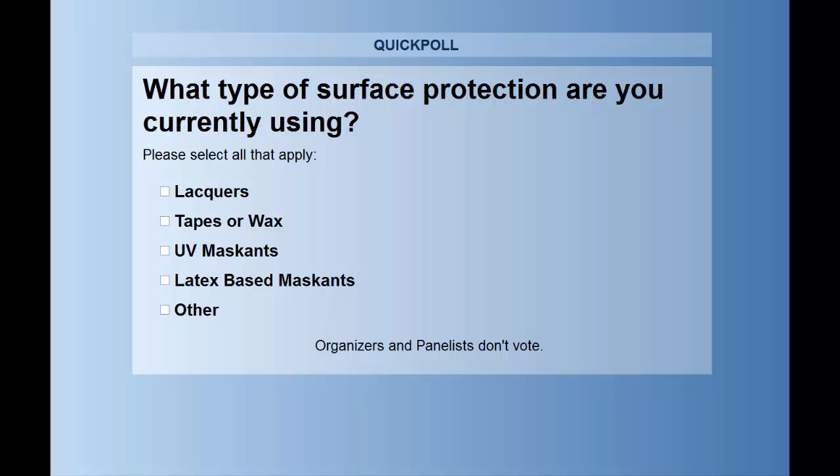All right, let's take a look at the responses. It looks like 20% saying lacquers, 80% looks like the highest, tapes or wax, 20% saying UV maskants, 24% latex-based maskants, and we already heard from many of our folks that indicated other. So I do thank you for letting us know.

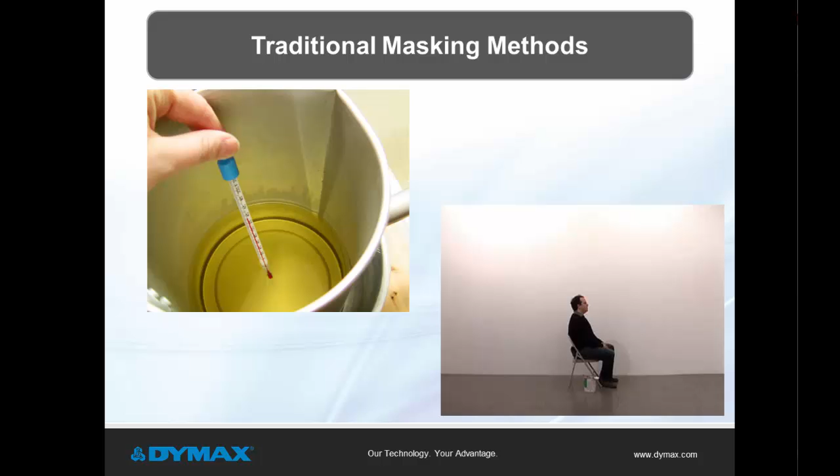Wax: first, you have to heat the part, then you have to heat the wax so that the wax can flow into the cavities or over the surface of the part. And then you have to wait for the wax to set up. With lacquers or latex-based maskants, the challenge is the dry time or the bake-off. You air dry each layer of the lacquer. It's like watching paint. You're sitting there forever.

So Jenny, what are some alternatives for masking during surface treatments? Lori, before we talk about light curable maskants, let's see how UV technology works. My colleague Irene will talk about how UV light curing works. Irene? Thank you. The typical UV curing process focuses mainly on the UVA range, 315 to 400 nanometers, as well as into the visible light spectrum. The proper wavelength along with the proper intensity are critical components of the curing process.

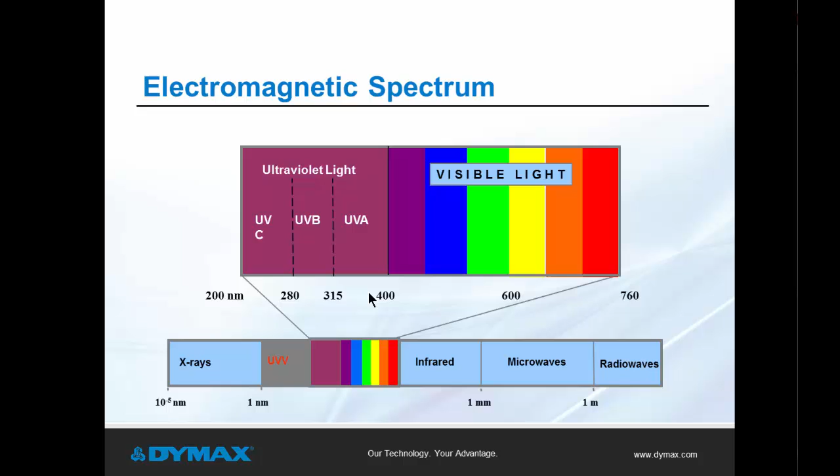Light curing materials are typically made of these basic elements. First, starting with the oligomer, which brings the basic properties such as chemical resistance or heat resistance. The monomer is used to add specific properties such as elongation, flexibility, adhesion to a specific substrate, or shrinkage. The additive is the fine-tuning for color, fluorescence, or surface finish. Some adhesives may have a tacky surface, as others may have a dry glass-like finish. The photoinitiator is the key for the ability to cure.

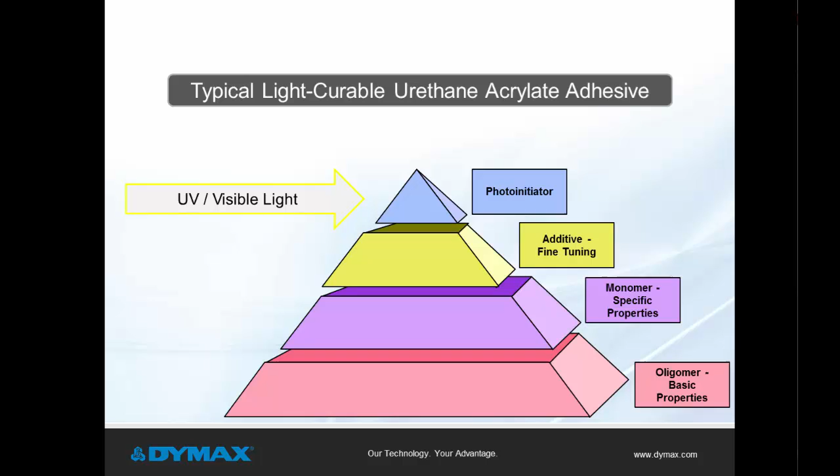All of these elements together become the formulation for the light curing material, but need the proper energy to complete the curing process. The photoinitiator package is designed around the spectral output of the curing equipment. Here you can see the peak at the 365 wavelength that aligns with the photoinitiator package of the adhesive, as you just saw in the previous slide. Formulations are designed for a specific type of curing mechanism. For example, a broad spectrum curing unit has a spectral output from 315 to just over 400 nanometers into the visible range. The photoinitiator will be optimized to match that same range.

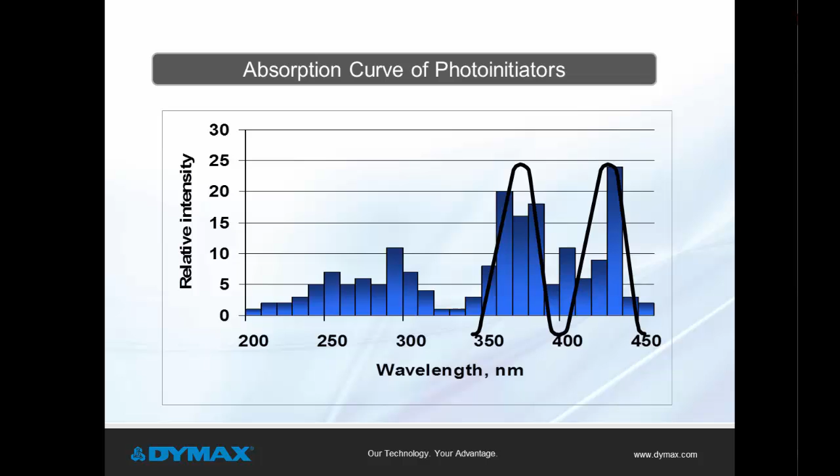Now for LED curing, the wavelength is very narrow, or just one specific wavelength, like 365, 385, or 405 nanometers. Optimizing a formulation for LED curing means the photoinitiator package needs to match the same wavelength to initiate and complete the curing process. The UV curing process begins when the photoinitiator in the light curing material is exposed to the proper wavelength and energy. Free radicals excited by the UV light exposure start the cross-linking process. This goes on to polymer propagation and final termination, meaning cure, or converting liquid to solid. This is how UV technology works.

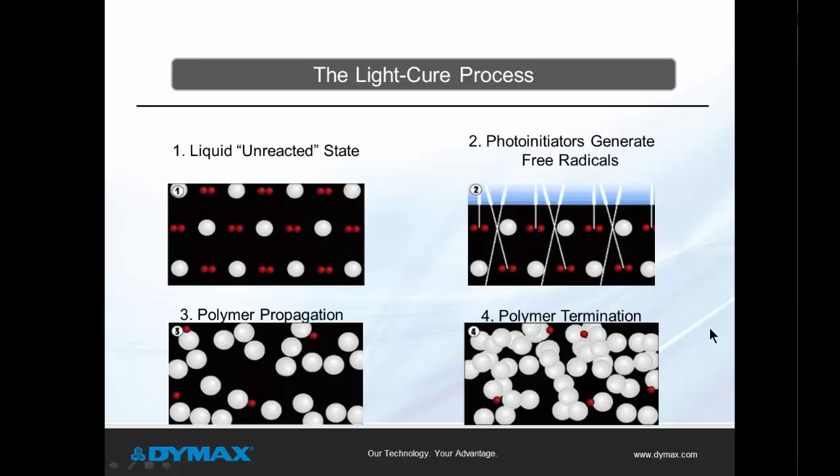So I will turn it back to Virginia to speak to Lori's question about the alternatives for masking during surface treatment processes. Irene, thank you. The alternative to traditional masking is UV light curable maskants. Now we've talked about how light curable materials are formulated and cured. Let's look at how UV maskants truly can impact your bottom line. Number one is increased productivity when converting from a manual process like tapes, or a masking process with a long curing time and drying time like lacquers and latex-based maskants.

This conversion will have a direct impact on your bottom line. The incorporation of light curable maskants can provide up to a 30% process savings over conventional masking methods. I'd like to go through and look at each of these elements of the benefits of light curing materials and how they can in fact impact your bottom line.

First, let's look at on-demand cure, reducing the process cycles. Two, shorter process cycles translate to shorter production processes, specifically how this is addressed in future slides. Solvent-free for green chemistries, 100% solids. This is applicable when you have a light curable material versus a solvent-based lacquer or latex-based, where they're usually about 50% solids. So already you have savings right there from 100% solids to 50% solids.

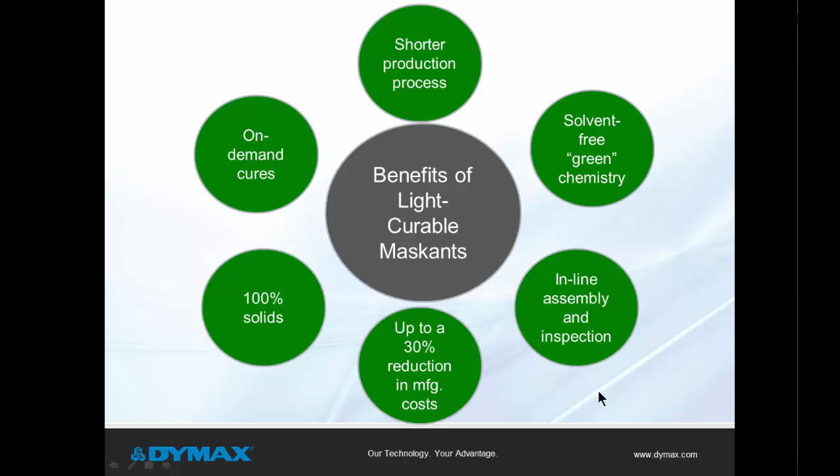Lastly, inline inspection. Light curable process can be incorporated into an automated line with the dispense and cure versus having to have area for racking the parts as you would with something that has a long drying time. How can light curable materials help improve your surface treatment process? Before we can answer this question, let me introduce you to light curable maskants.

Key differences to conventional masking options: cure on demand. As Irene explained the curing process, as soon as the masking is exposed to the proper wavelength, the cure starts. So within less than a minute, your product is available for the next process, rather than waiting for a very long dry time or a bake cycle.

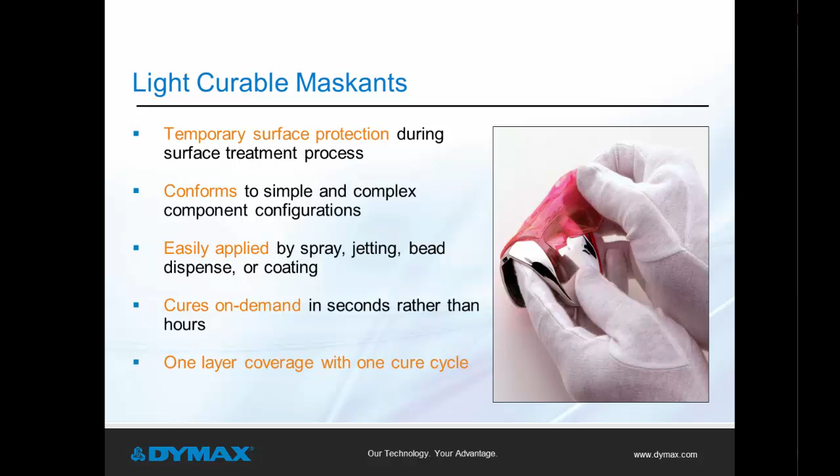Key features of light curable maskants are visibility, the ability to see it during the surface treatment process. As you see in the image here on the right, this particular one has a yellow maskant, so you can visually see the mask on the part, where it is and where the protection will be. The maskants are thixotropic. That means that where they're applied, they're going to stay, whether it's on a vertical surface or on a horizontal surface. It will stay in place.

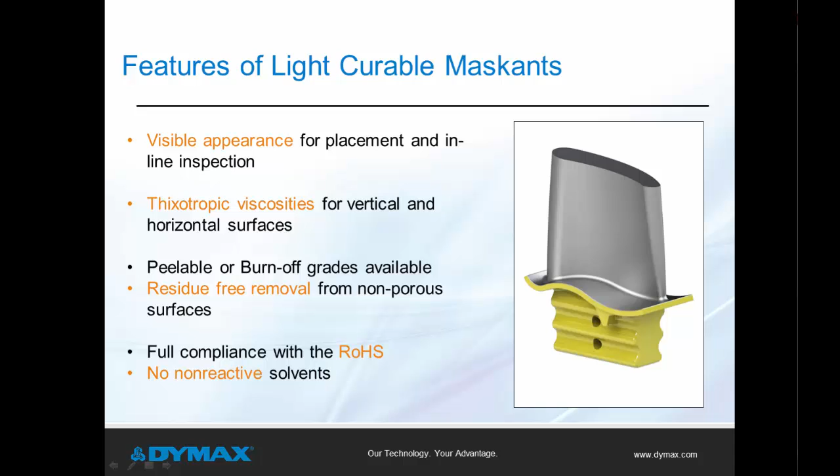After the curing process and after your surface treatment process, the maskants can be removed either by peel or by burn off, leaving a residue-free surface for non-porous surfaces. The maskants are formulated to be solvent-free, 100% solids for greener processes, and RoHS compliant. Now that we've talked about the introduction of light curable maskants, I'll turn it back to Irene.

Right, thanks, Virginia. When applying the light curable maskants, the typical thickness can vary anywhere from 15 mils to 50 mils, and this is to provide the necessary protection during your unique surface treatment. The thickness requirement will vary depending on the surface treatment process, whether it's a light blasting or an aggressive chemical treatment. These maskants have been successfully used to provide protection on features as small as cooling holes or as large as your dining room table.

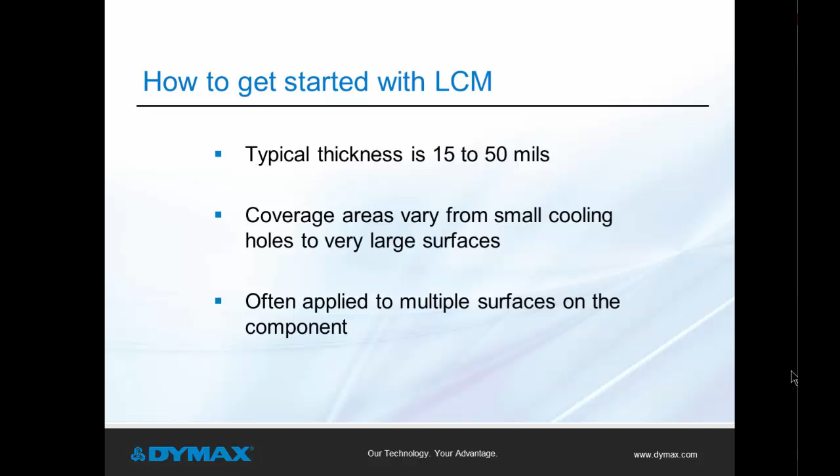We just talked about the application of the maskants. There are many options to deliver the fluid to the surface of the component, from bead dispensing to spray systems or jetting. The dispenser on the top left side is mostly used for small areas, such as cooling holes or connectors on a printed circuit board, using syringes as the maskant package size.

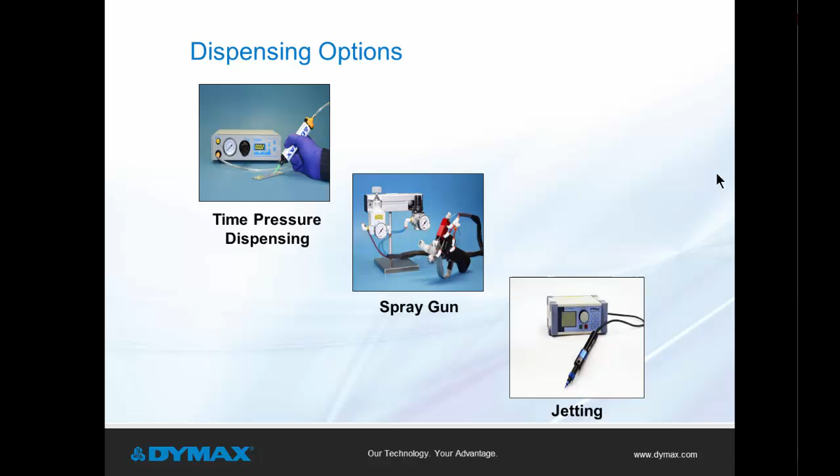The spray gun in the middle can be used as a manual or an automated process with cartridges or pails for larger volumes. The jetting is a precision dispense of dots, beads, or a defined area and can be used in a semi or fully automated process.

There are other manual methods to apply the light curable masking, such as brushes and dipping. Screen printing and foam rollers are not recommended because this application method may create bubbles, and these bubbles may be a pathway for leakage.

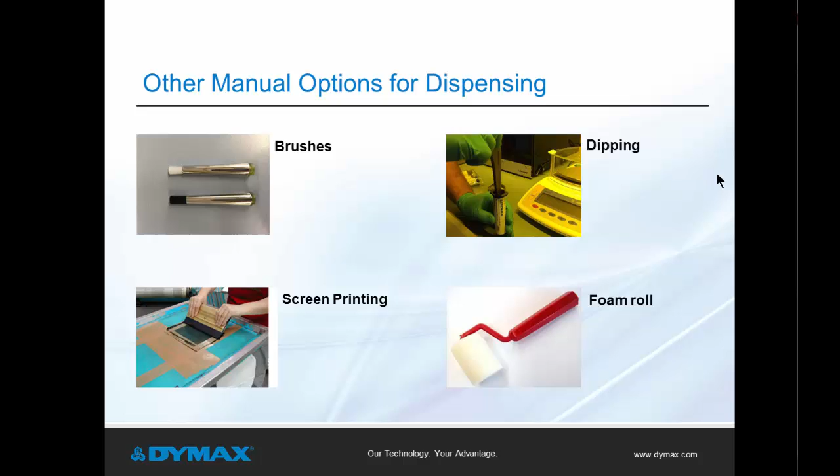Curing equipment needs to be selected to meet your production needs. The UV light source is critical to the UV mask curing process. UV curing lamps and systems of various configurations and styles are commercially available. Spectral output of the lamp, intensity, component configuration, desired production throughput, and budgets are all factors that help determine which type of light curing system is appropriate.

Complete cure of the UV masking resin each and every time is critical to achieve reliable and repeatable protection of the masked surface. The best source for assistance in selecting a curing system and qualifying a curing process is the manufacturer of the UV masking resin.

Their expertise with both UV curing resins and curing equipment can help implement a complete optimized system that supports the masking process with minimal time and expense. All of this, of course, must be validated in the surface treatment process to ensure all performance requirements have been met.

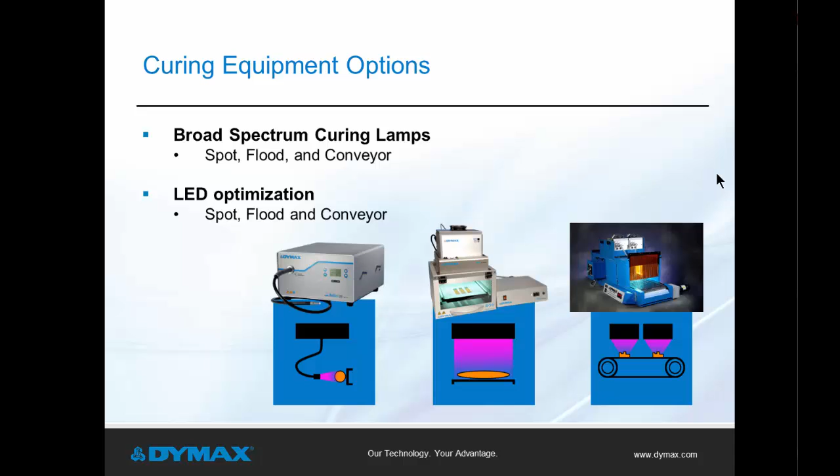The final aspect of the masking process is the removal. Light curable maskants are formulated to be peeled, burned off, or water-soluble removal. Incineration cycles can be as short as 10 to 30 minutes at 1200 degrees Fahrenheit. This removal method is used in the aerospace and IGT industries for components that can withstand these higher temperatures.

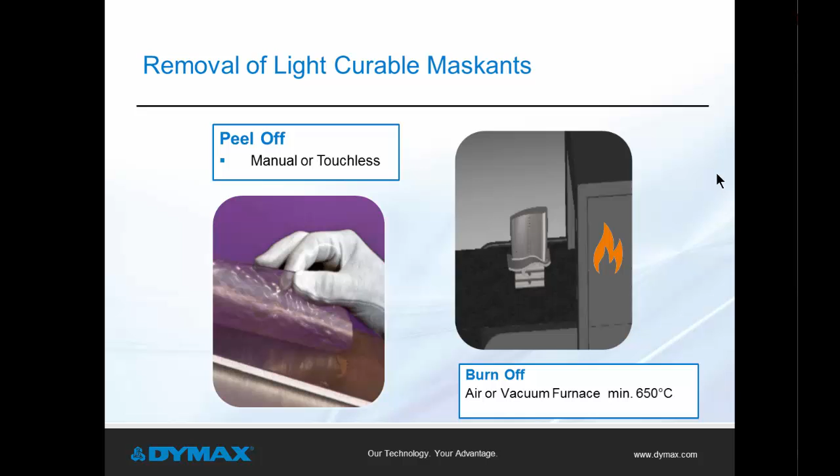Touch-free removal options are available. These methods involve extreme cold, water, or air. The selection is dependent on what your component can be exposed to without harming the surface, texture, or component, as with a printed circuit board. These options range from exposure of the masked component to extreme cold, using dry ice, or to warmer options such as using a hot knife to assist with the removal.

Well, thank you so much, Irene. Very informative. And Virginia, if we could turn back over to you, and perhaps you could tell us where these products are currently being used.

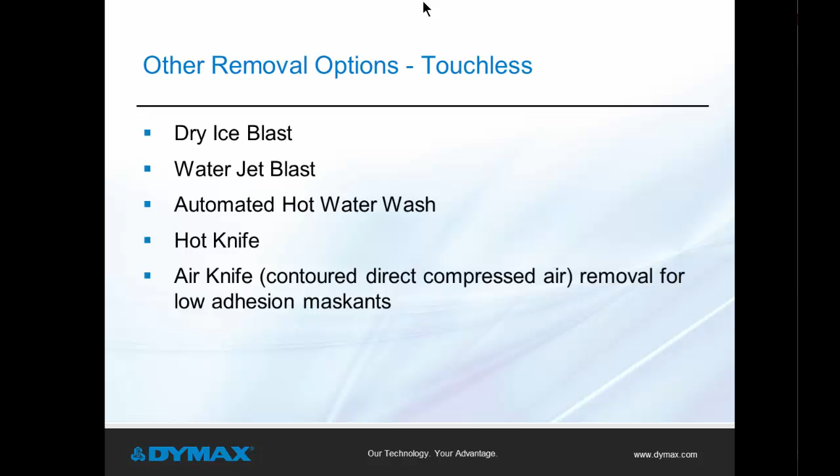Thanks, Lori. I'd love to tell everyone what industries are currently using light curable materials. These industries are aerospace, both on the OEM side and the MRO side, industrial gas turbine, again on the OEM side and the MRO side. The OEM is the original engine manufacturer, and MRO is maintenance, repair, and overhaul.

These same light curable maskants are used in the orthopedic implant manufacturing processes, in glass fabrication, in the engines for railways, in the metal finishing industry, as well as in the electronics industry in the assembly of printed circuit boards for protection at the board level.

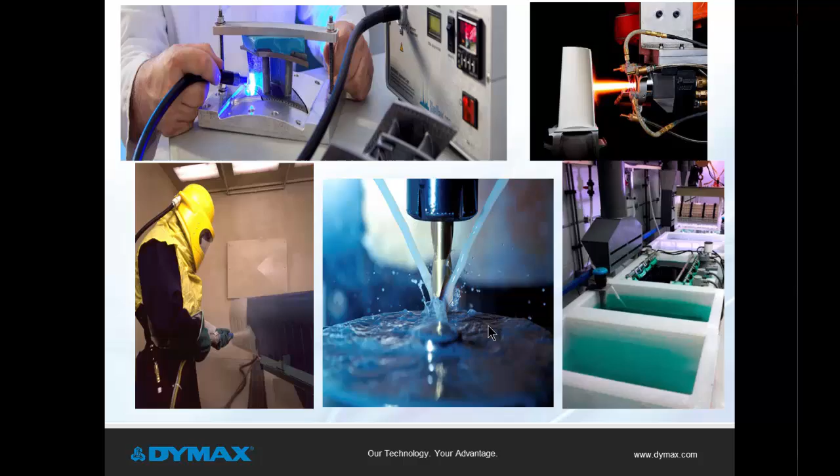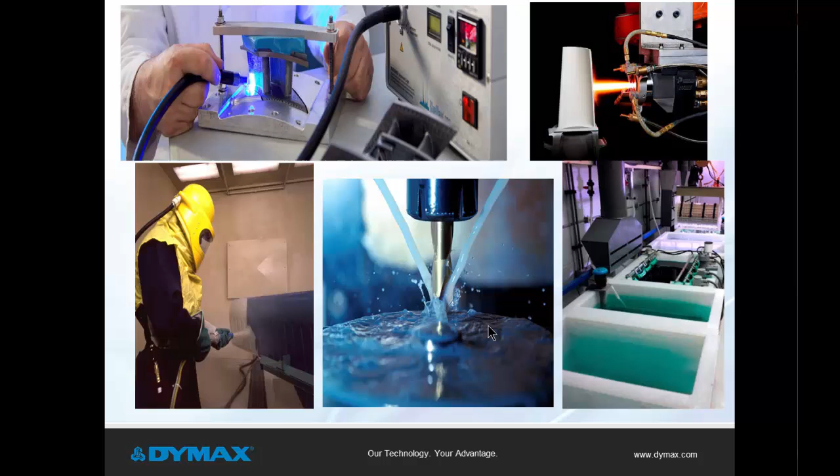Now that you know what industries are benefiting from light curable materials, I want to tell you about where and how the maskants are being used. First, airflow testing. If you look at the image in the top left-hand corner, that's a small airflow rig. In aerospace and IGT, on the hot section parts, there are cooling holes that are installed. Where the cooling holes are installed, the airflow can be measured.

Some manufacturers measure mass airflow, where maskants aren't going to be used, but when they need to check the cooling holes on a row-by-row basis, each row can be masked off with a peelable mask and then peeled off to measure the flow from that individual cooling row of holes.

Next, if you look at the image on the right-hand side here for the plasma spray, thermal barrier coatings are using light curable maskants for protecting cooling holes, leading and trailing edge, the tip, the edge of the platform, or even in the root. Light curable maskants are also used in grit blasting and shot peening, as you see in this image on the lower left. This is a grit blasting application.

Here in this center image, CNC machining, polishing, grinding, laser drilling are all areas where light curable maskants are used. Here in the last image on this page is for chemical processes, whether it's anodizing, chemical milling, etching, acid stripping in the MRO industry, or in plating. Also, the light curable materials are used in protection for painting and e-coat.

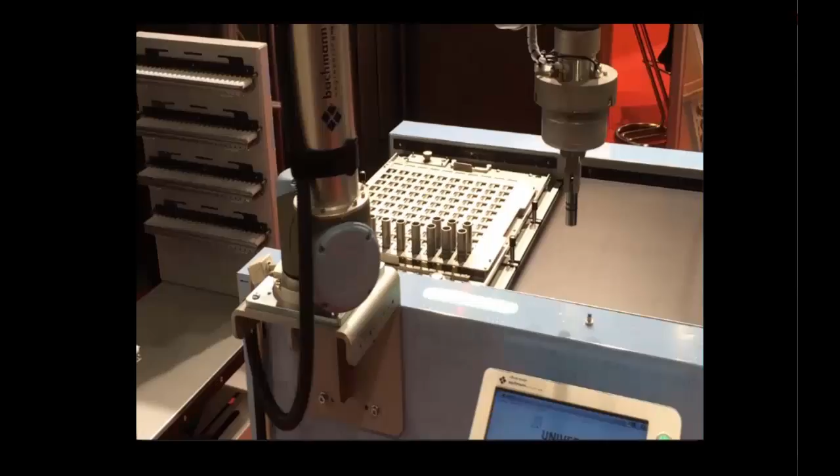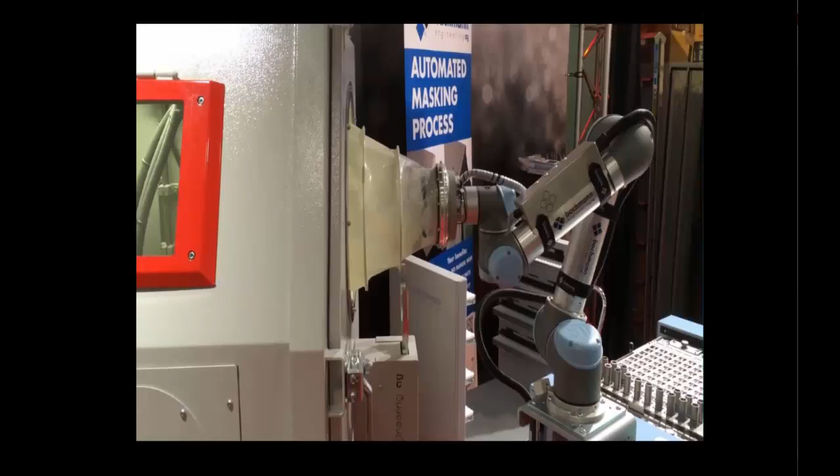We've talked about where light curable maskants are used. I want to share with you a video that we have that will demonstrate the use of the maskants. Here you see a robot is picking up a tube that already has light curable maskant on it. If you can see the two rings of blue, that is actually the light curable maskant.

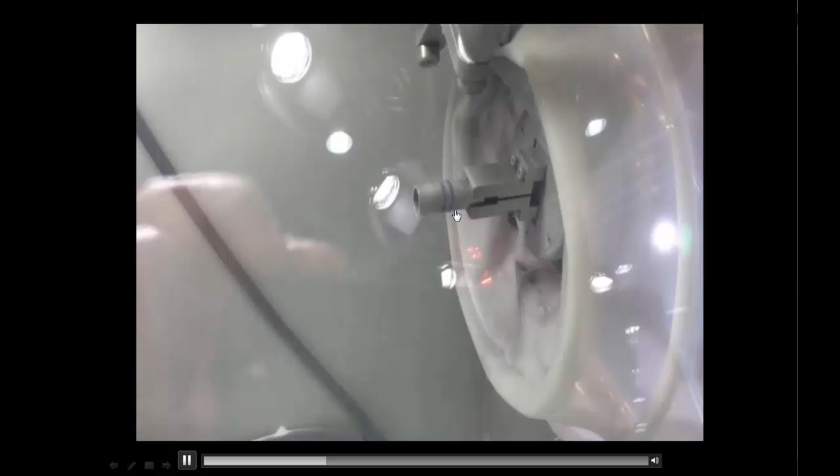The robot is inserting the tube into a grit blasting process. You'll see the grit is coming from the nozzle here. Right here, these two rings of blue, that is actually the maskant that's been cured. As you can see in this grit blasting application, the mask is protecting the tube without lifting.

The media is bouncing right off of the maskant. The maskant is holding up during this process and remains visible so you can see where the mask is, and is resilient to this surface treatment process.

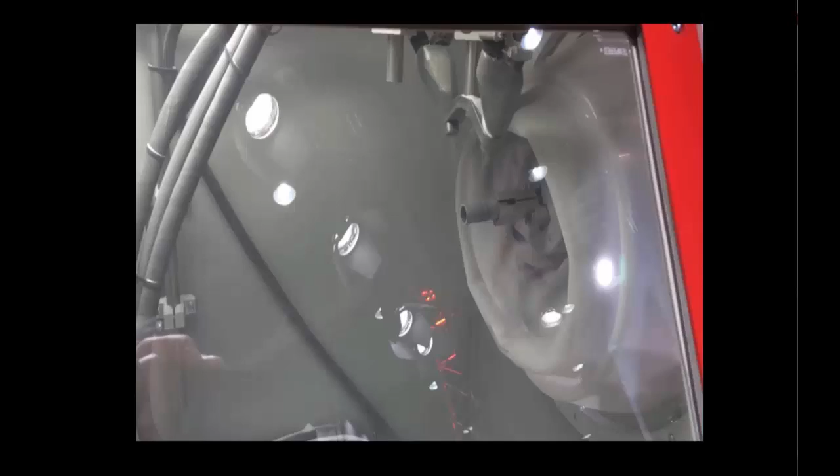We'll let the video finish up. I would like to let you know that this video is courtesy of one of our partners, Bachmann Engineering, and they were kind enough to let us use this video to demonstrate to you today how the light curable maskants are used in the grit blasting process.

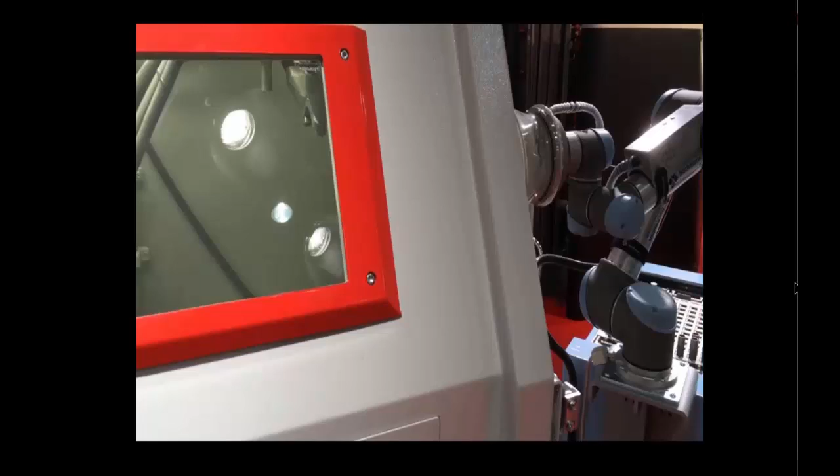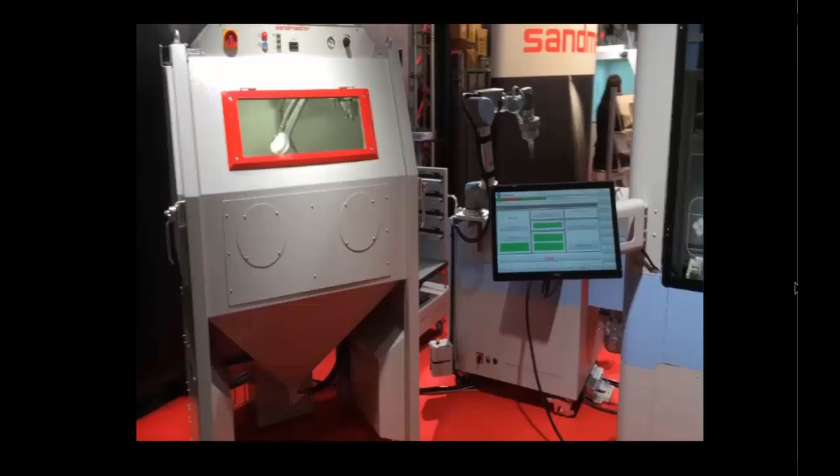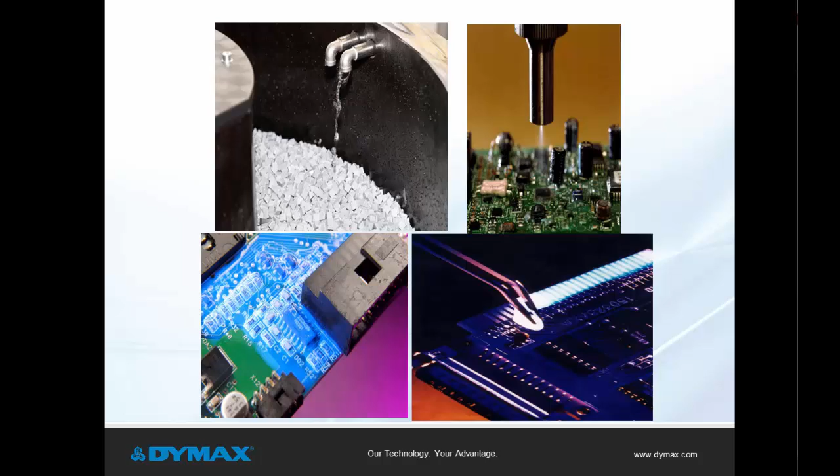Now I'm going to turn it back to Lori for another poll question. Lori, can you tell us about this poll question for our audience? I would be happy to. Folks, coming up on your screen is that next poll, and we'd like to hear from you. What are the top challenges with your current masking methods? And you will notice that you're able to select all that apply, but we're going to ask on the honor system today that you give us your top two. Is it high labor costs, high rework and scrap, ease of use, low throughput, or maybe other?

Okay, results are showing 48% saying high labor costs, 29% high rework and scrap, 42% ease of use, 42% low throughput, and 26% coming in with other. Ginny, any thoughts about these responses? Sure, Lori. This is very typical of what we've seen, and the customer experiences that we're going to talk about are going to demonstrate that. But high labor costs is something that we hear from our customers that are impacting their bottom line, and they're looking for ways to increase profitability and reduce that. So this is definitely in line with what we've seen from the industry.

So far, we've talked about techniques to enable faster processes, as many of you have indicated that that's exactly what you're looking for. Improving throughput with on-demand cure, greener processes with solvent-free resins. At this point, I want to tell you about 4 customer experiences that we've had that we were able to lower manufacturing costs and reduce waste in their manufacturing processes.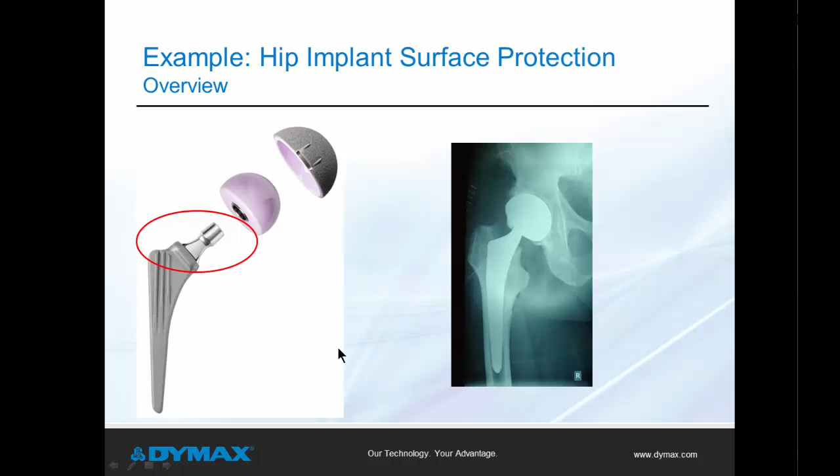The reason for the surface texturing is, as you can see here in the X-ray, when the patient receives the implant, there has to be growth between the existing bone and the implant. This texturing is going to create little nooks and crannies for the bone to grow into. So that surface texturing is essential for patient comfort after the implant has been received by the patient.

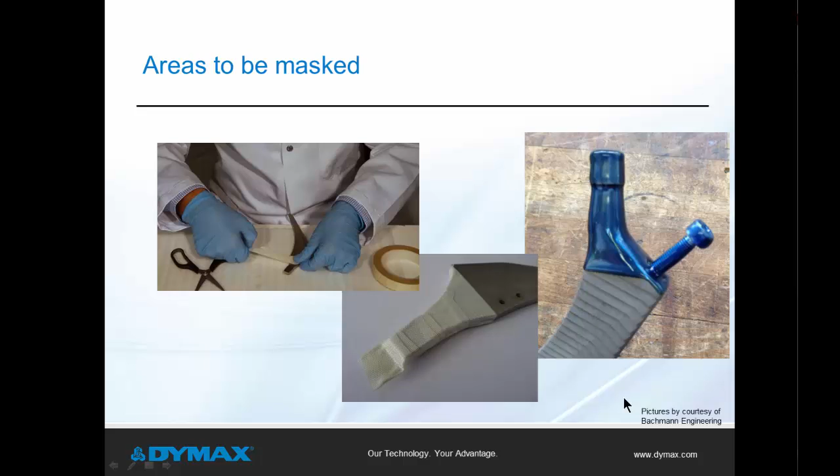The center image here shows what it looks like afterwards. If you look here on the right, this is what it looked like after the UV material was incorporated. What did it do for our customer? In this particular case, the labor savings went from 10 minutes to 2 minutes for the application of the mask. They were able to eliminate the cleaning operation to remove the residue that the tape left and the drying time, so it resulted in a 3-minute savings per component.

So based on 1,000 parts per month, this customer was able to experience 183 hours of available capacity for other new business. If you look at the rework and scrap savings that they had, they were able to reduce their scrap from 0.1% to 0 because they had a repeatable and reliable process. The tape wasn't lifting. The maskant covered the whole surface. So this translated for this customer of ours to an $18,000 reduction in scrap expenses annually.

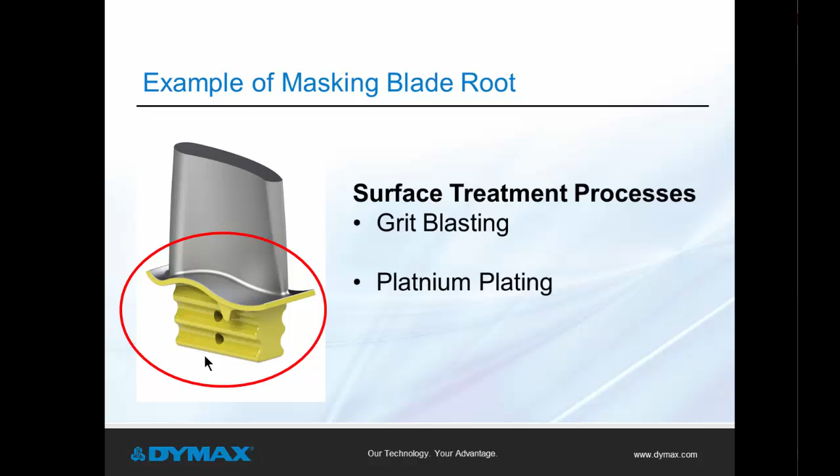I want to take you now over to the aerospace industry. Here we have an application where they're masking off the root of a turbine blade. And this is in preparation for grit blasting and platinum plating. For this customer, their labor savings, the application of the mask was reduced from 30 minutes to 2 minutes with a semi-automated masking process. They also were able to eliminate the cleaning operation for the tape, so that 2 minutes was saved altogether. So for this customer, their savings was about 1,100 hours per month. This was based on a volume of 2,000 parts per month, giving them more available capacity to take on new business as well.

Now, let's look at the rework and scrap savings. They were able to reduce their rework by 3 minutes, and they reduced their scrap from 0.1% to 0%. So the rework reduction equated to 100 hours a month, and they were able to have a $60,000 reduction in scrap expenses annually. Very happy customer after this.

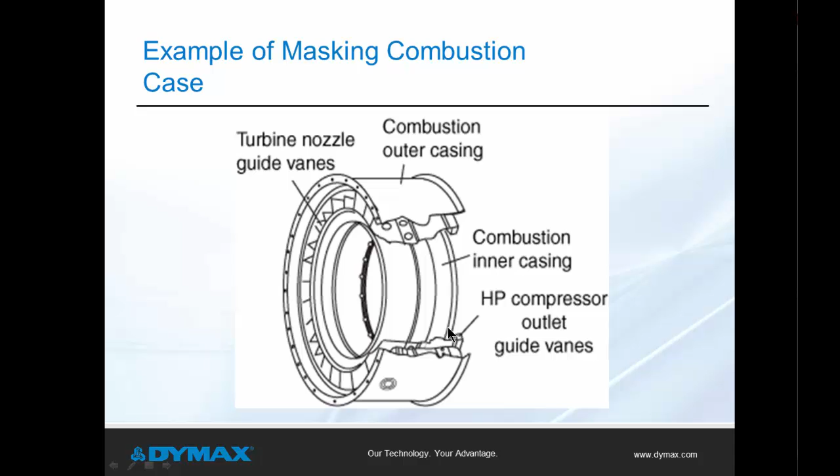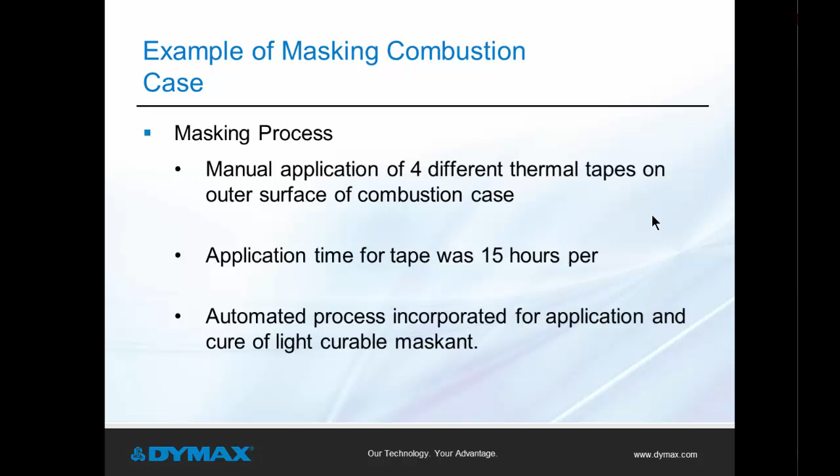Now, the third example that we have is a customer that was masking a combustion case, as you see here, this part. Now, in this particular case, our customer was using 4 different thermal tapes for their plasma spray process. And it took them 15 hours to mask off 1 combustion case. Now, they had a requirement of 50 cases produced a month, and this became very painful for them to mask up all these parts. It's a lot of hours, so they started looking for alternatives, and they wanted to have an automated process incorporated for the application of a mask.

So we were able to help them out with this. The labor savings reduced the application of the mask to 1 hour, from 15 hours down to 1, giving them a savings of 14 hours. They also were able to eliminate the cleaning process, which was 30 minutes. So the savings for this customer was over 40,000 hours per year.

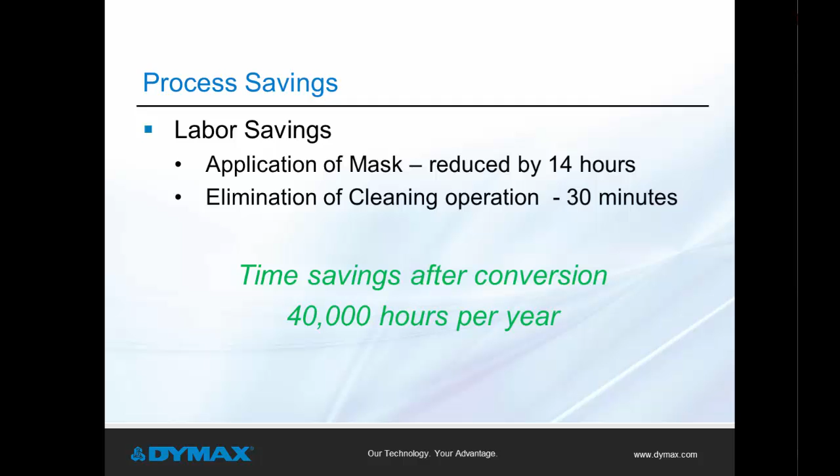Now, Jenny, those are some amazing results and fantastic examples. And from our registration data, we know that many of the folks on today's webinar are from the electronics industry. And I know that you have a great example from electronics, so perhaps now's a great time for us to take a look at that.

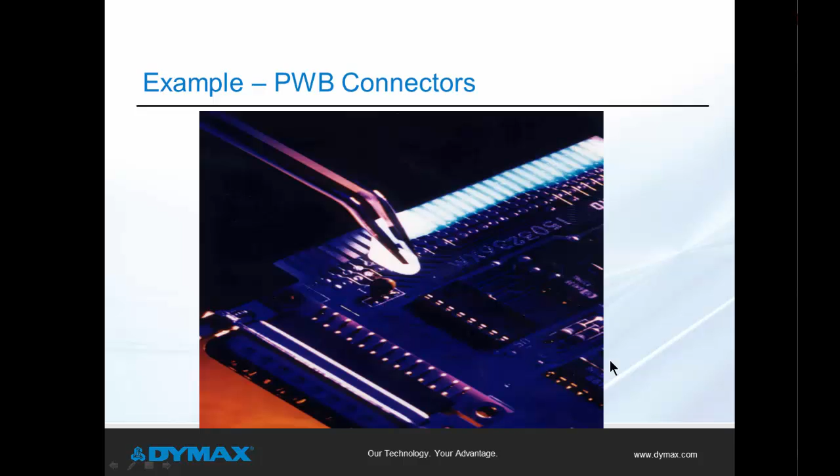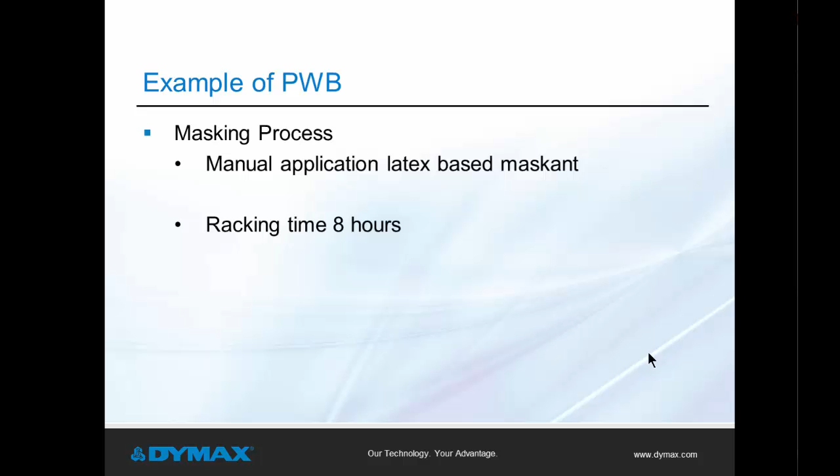Lori, I'd love to share this experience that we had with this customer from the electronics industry doing assembly of printed circuit boards. In this particular case, they are masking before conformal coatings. So their manual process was a latex-based masking, and this product had to dry. And so they had to rack up all the boards, and it would take 8 hours to dry. Whether it was 1 board or 100 boards, they still had to wait that 8 hours for each of these boards to dry so that they can move them on to the conformal coating process.

The incorporation of the light curable masking was able to provide them a significant labor savings. So they went from 8 hours of waiting to dry before they could move their parts to the conformal coating. With the light curable maskants, they were able to reduce that to just 3 minutes. Huge, huge savings for them.

They also were able to reduce their rework by 40% because they had something that was reliable. With the latex-based mask, they were experiencing shrinkage during that drying time, so that created gaps around the mask. So during the conformal coating process, they would get coating in the gaps where the masking had shrunk. With the light curable material that has very, very low shrinkage, this was not the case.

So consequently, their rework was virtually eliminated. The masking process here with this customer, we haven't finished all the development, so the total savings I don't have for you because we're still trying to define an associated dollar value with freeing up the floor space that they no longer will need to use for the drying area for the boards while they're in queue before conformal coating. This is just a great example of how light curable maskants can provide advantages over traditional masking options.